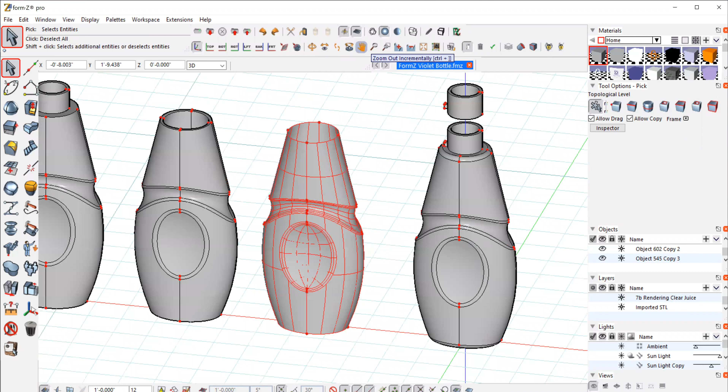I'm going to go back in our history of building the bottle and bring in the surfaces that we had created. I changed these surfaces for the 3D rendering and some of the other procedures, but I'm going to go back and we're in effect going to rebuild it for 3D printing here.

So I brought the surfaces in, I mirrored it back, and stitched them together. Normally, we just put a cover on the top, two-dimensional cover on the top and the bottom, and stitch that all together, and then we can create a thickened wall thickness.

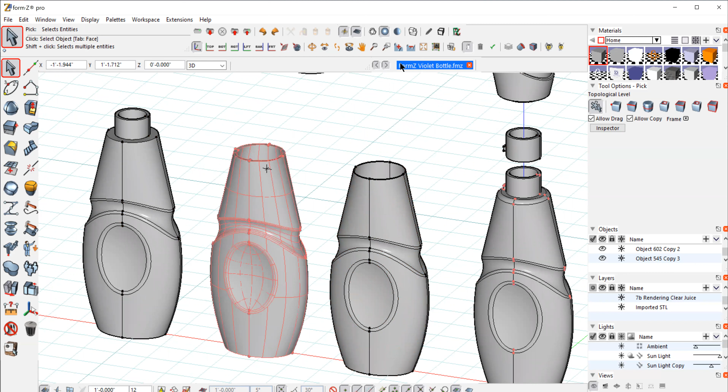There's this thicken tool over here, and we can select that and do a thickness. This particular one didn't work when I put the top and the bottom on it, so I'm just going to go about this a little bit differently. It did allow me to thicken the surfaces right here without putting the top and the bottom on it, which was good. So a little bit of a workaround to get this to happen. Got to keep that in mind.

There are many ways to accomplish these. So if something doesn't quite work right, think about other ways to get there.

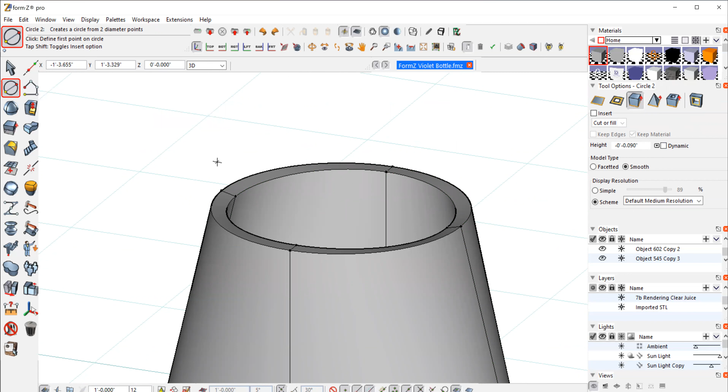So I'm going to put a cover on here with a thickness to it. I'm going to create a disc here with an extrusion. I'm going to go negative 0.09 because that's the wall thickness that I did for the rest of the wall. And I'm just going to make this 2D surface at the top, 3D surface at the top to cover this off. So I'm making that as an extrusion so it has a thickness to it.

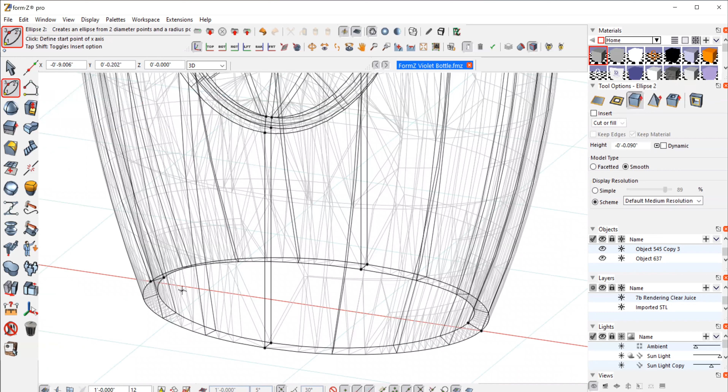I'll do this in wireframe so we can see. I'm going to use the oval tool here because this is an oval bottom. So I'm just selecting one side, coming to the other side. I need this to be positive though because I'm at the bottom, 0.09. And then I'm just going to click on the other side. So now I have that closure at the bottom.

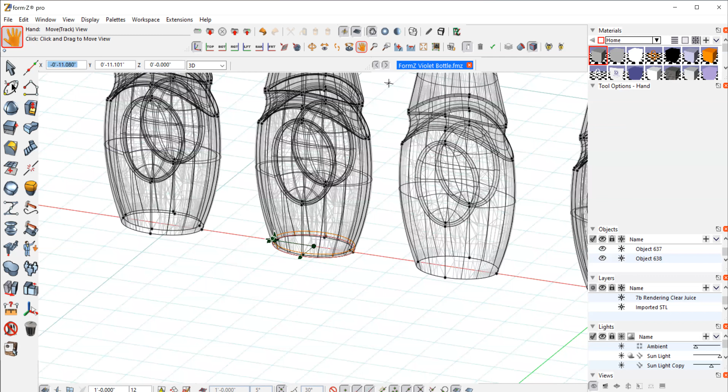And this should close up, and then I'll have my walled structure. Union. Okay, so now I have this completely sealed. It's hollow. I have a 90 wall throughout the whole part. So this is ready for that.

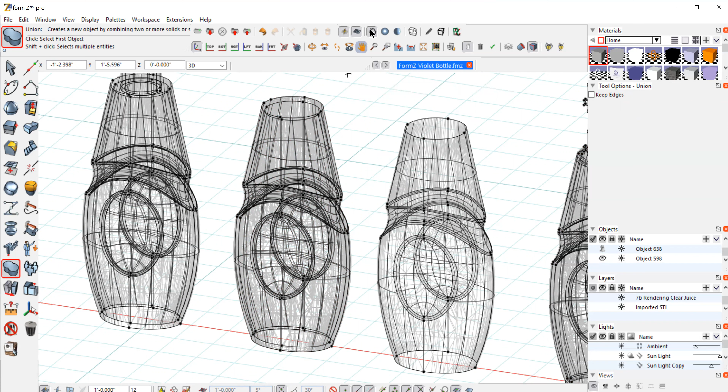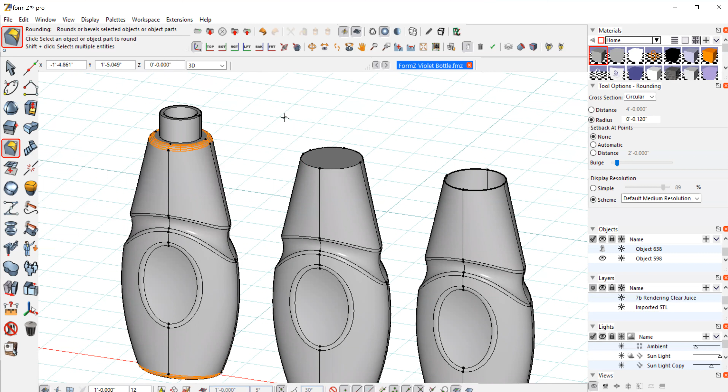So now I need a radius on the top and the bottom. So I can do that now. Since I have a nice thick wall, I can probably get away with about 120 thousandths radius. I think I did that both at the top and the bottom. So I'm just going to select that continuous lines section across the top, go to round. I think I did 0.12. Yeah, looks about right. So now I have a nice radius, top and bottom.

So that's ready to go.

Normally at the bottom of a bottle, you'll notice that there is a push-up, or sometimes referred to as a punt, a bump-up area in the bottom. That's for a couple of reasons. That's for structure, so when you pick it up, the bottom doesn't belly out because of the liquid inside. So it creates structure by having that negative curve at the bottom. And it also reduces the surface contact when you put a bottle on a flat surface. Sometimes if there's a little bit of water on it, the bottle will hydroplane. It'll kind of move around because it's not making contact there. So that push-up area has a couple of reasons, but we're not going to put that in our file because a 3D printer wants a nice flat surface to start with. It wants to print the flat surface, and then it wants to build the rest of the object from that. So in all our files for 3D printing, we're not going to have that push-up.

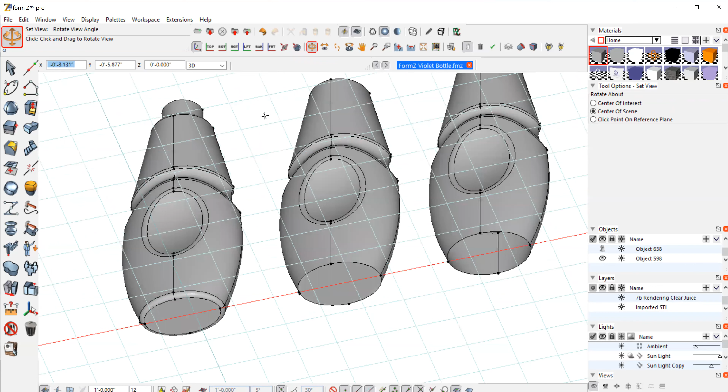So that's ready to go, and I have my radiuses. Now we need to simulate our finish. The finish is this area, the thread pattern or the screw pattern that we're going to have on top. We're not going to make thread patterns. We're just going to make this as a simulation of where the finish would be. We don't have to worry about the mechanics. And the screw thread, that can be an involved process.

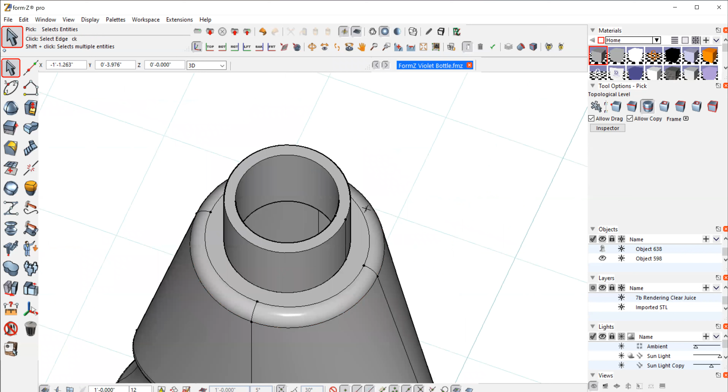I never do it myself. I get the 3D thread patterns from the engineers that create the preforms for these thread patterns that are tolerant to work with certain closures. So I'll get that geometry and I'll put that in the file if I need to. So all we're going to do is just create this 2D closure, 2D wall closure. And then we can do that with our tool in here. Let's see, it's 2D wall, 3D wall. And we can set up the specifications for that, the height and the thickness. It's a pretty straightforward part.

There's no real designing going on here, it's just a place to put our closure. So we create that, and then we difference that from that. Let me just

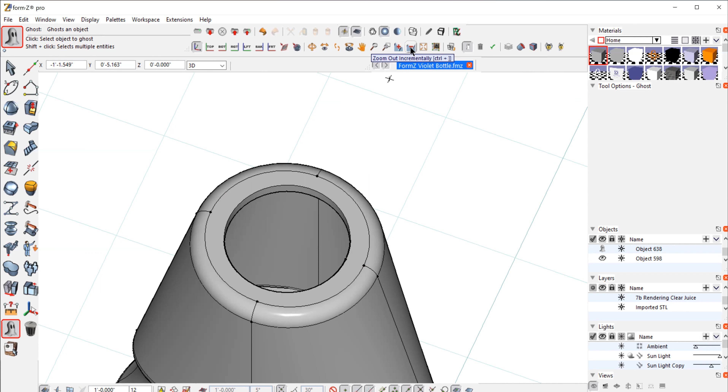We'll ghost this, difference that, take that leftover disk that's inside, and we'll end up unioning that. In most cases you're just going to make a straight dowel shape, a cylindrical shape, and then fit your closure on that. Sometimes if it's oriented, we need a little fitting, like this little block that's kind of arbitrary. I built this little shape and I'm also going to put that into the bottom of the closure because my closure is not perfectly round. It's oriented. If it's round, you don't need that — your closure can just spin around the top of the bottle, so that'll be fine. In this case I built that little notch in there, then I would union that to my bottle, and that part is ready to go.

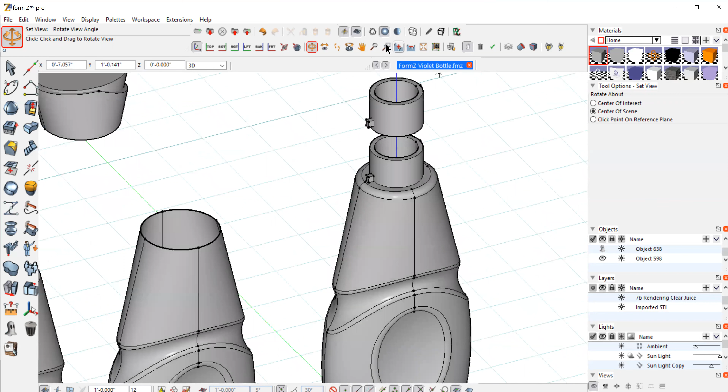So we have to talk about the closure now. With that simulated finish on top, I need to put an opening into the bottom of the closure that will fit over this. So we need to do that with a tolerance to it.

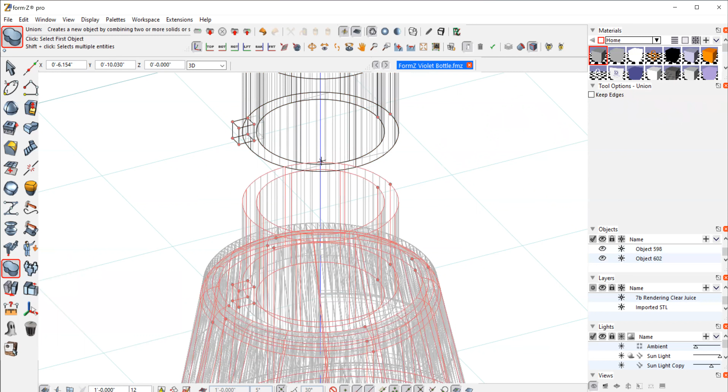So I have these parts here, I brought the parts up. Let's go into wireframe — there's my 2D closure, and I made this little block. So what I would do is just take those and union that together. And that's exactly what I have in the top of my bottle. So that's the part, and the reason I'm separating this is because I want to create a tolerance that I'm going to use to difference it from the closure.

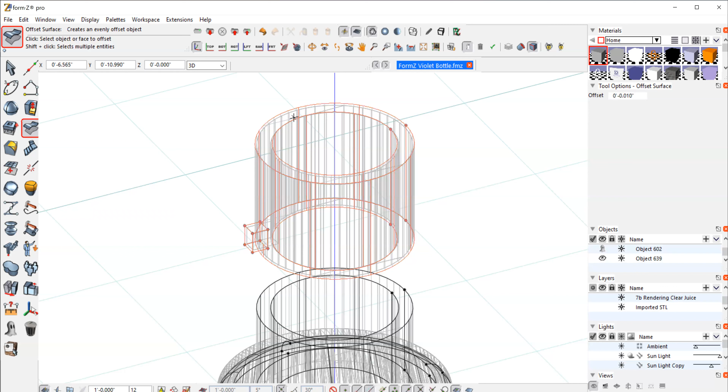So what we can do is select this shape and offset it — not thicken, but offset, the first tool down the bottom. Offsetting will make a larger version of this, so all I want to do is move this a very small amount so I have a clearance. I'm going to put this at 10 thousandths, so it's 0.01 — it'll give me this 10 thousandths clearance. I'll click in space here, and you'll see it move out slightly. So there it is, it moves. So I have a 10 thousandths clearance all around this entire part.

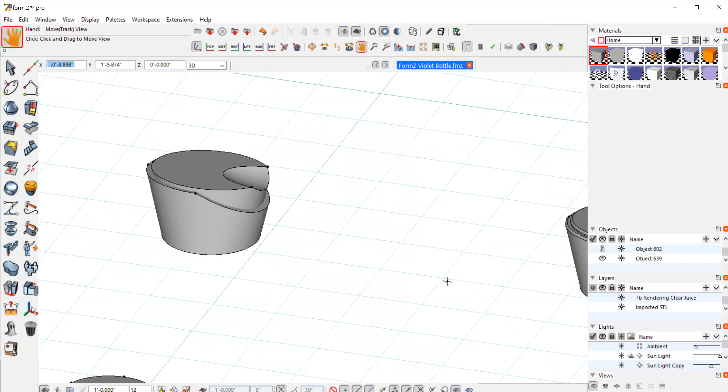And what we're going to do with that is take it and put it up into the closure and difference that. So we need to prepare the closure the same way we prepared the bottle. I brought my geometry in — if you remember the closure layer, I had built these two parts. In this situation we're going to take those two parts and union that together.

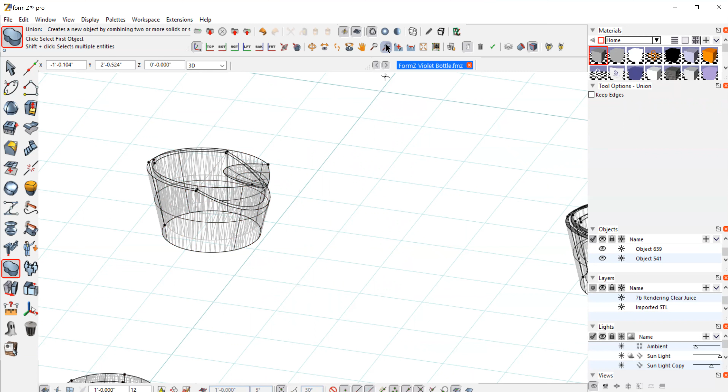Come on guys — take those two parts and union. So now this will be all one piece. And I am going to do my radiusing first in this situation. I created the wall thickness in this and it worked really well, so I'm going to do the radiusing separately. I'm going to do this little finger detail here first.

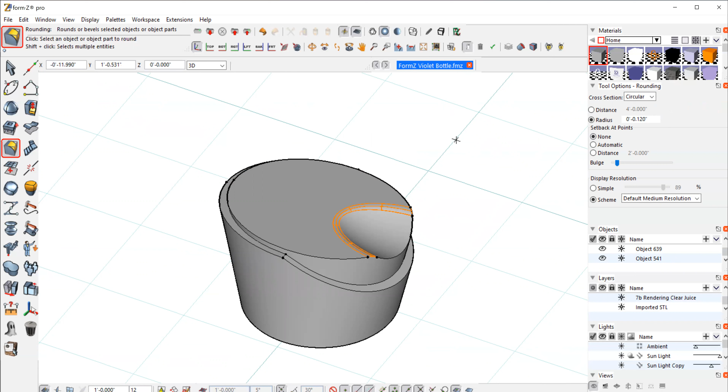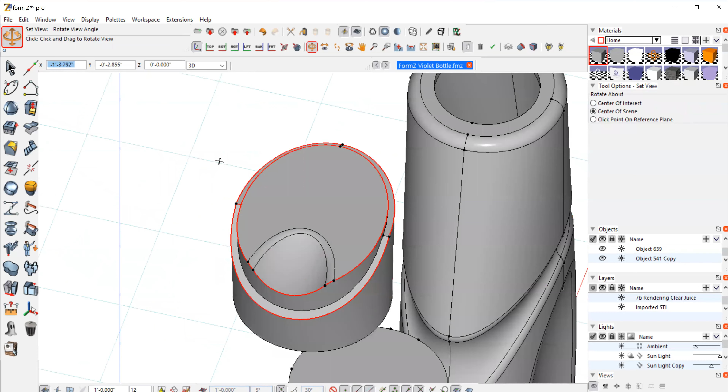I believe maybe 120 — yeah, that looks good. And then these other two sections, I'm going to select that line sequence, and select these other ones also, just this outside one here, and I believe I'm going to pick this little one here also. I think I did all those at 30 thousandths. This is just to hit off that edge, so it's on a sharp edge.

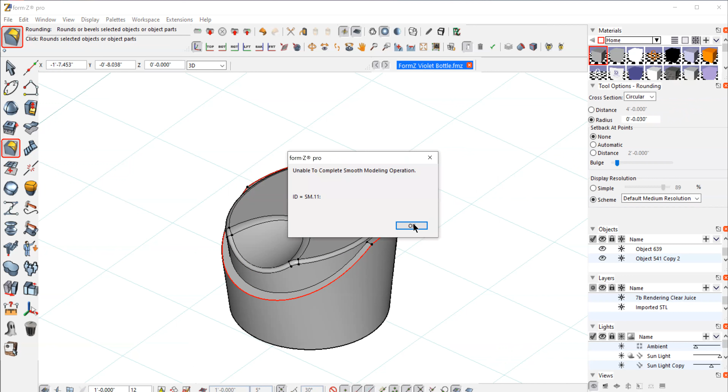Okay, it's not doing it, so let's do them individually. Let's select that one first, around 30. Okay, and then we'll do this one — that should round. Huh, so that's the one that's not going. Not sure why, I'll select those as individual sections — maybe that'll help.

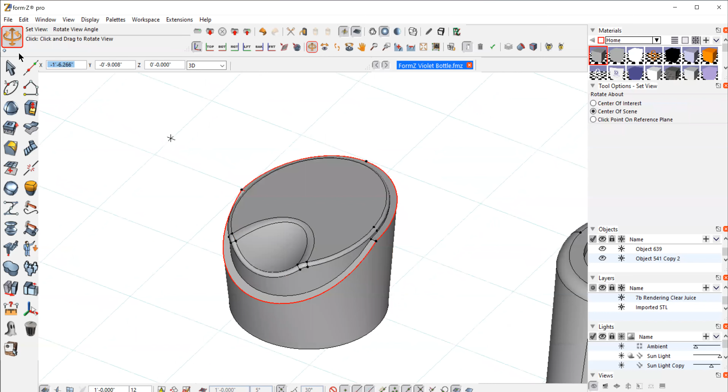Okay, we have the other side. All right, let's see if that rounds at 30. Okay, so that was it — I needed to take my time on that. I was trying to select them all at the same time. Okay, so we have all that radiusing going on.

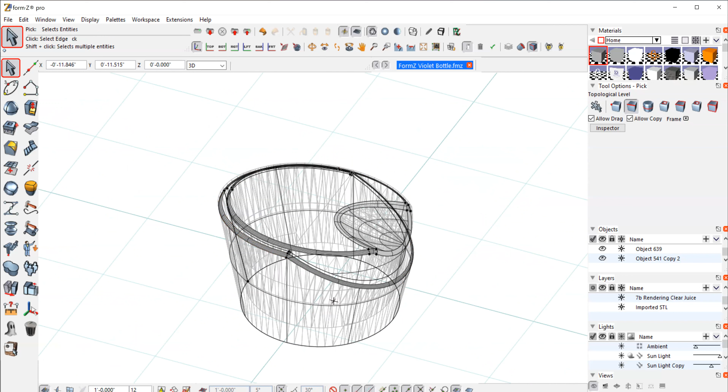So then we have to do the same thing, we have to create this wall thickness. Again, I could send this in as a solid, but since I want to open up the bottom so it fits over the finish on the bottle, I'm going to make this hollow. I'm going to do the same wall thickness — minimum 1.5 to 2 millimeters is a good wall thickness for strength. I tend to go 60 thousandths to 90, there's a bit of a range in there. I tend to go a little thicker to make sure we have enough stability in the part.

So that can vary, but they recommend 1.5 to 2 millimeters. If you have a large file, go thicker. If yours is pretty small, you can go thinner.

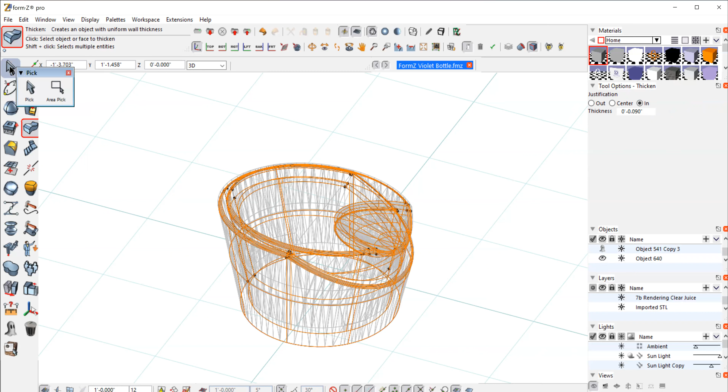So again, I'm going to go to the thicken tool. I have this selected, and I have it at 90, and it should go in. Sometimes it goes out, not in. Okay, so this worked really well. This is what I had expected the bottle to do, but it didn't, so I had to build it a little bit differently. Now I have a wall thickness.

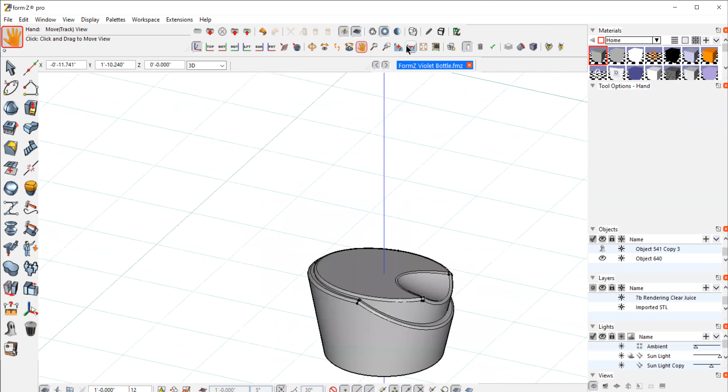If you remember, I took that finish detail and I toleranced it out. So what I'm going to do is push that up into the bottle structure. I'm going to select that, like a wireframe, view front. Now I have that piece inside and I'm clearing it.

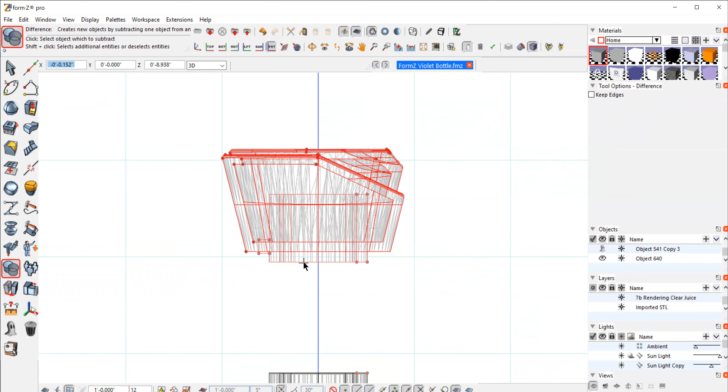So all I have to do here is difference that. I'm going to select the closure, difference that from that, and I will have the opening that's going to fit over the bottle. You can see the disc that's just the center of that part, so we don't need that. We're going to delete it.

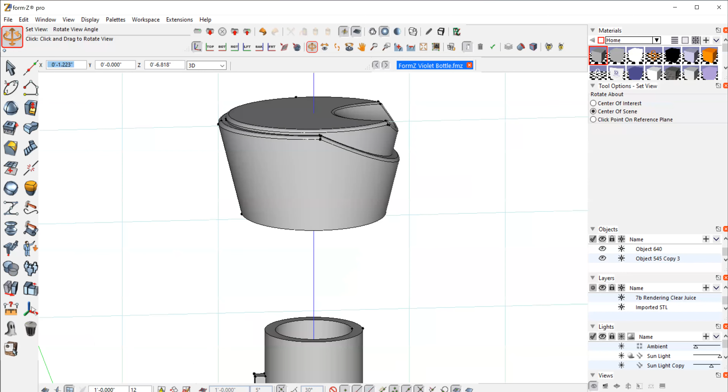Okay, so now this part will fit over the finish that I have on our bottle. So that's preparing the two parts, they're ready to go. These are parametric files.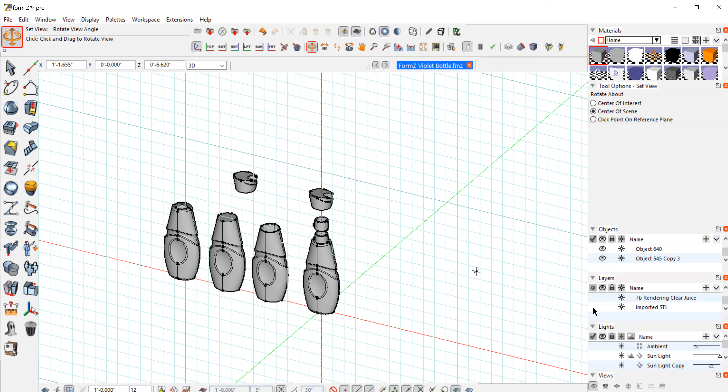We need to send ours out, not as a wireframe, but as a faceted object. So I have the original faceted object that I had sent out over here. I'm going to turn points off because this can get quite complicated looking.

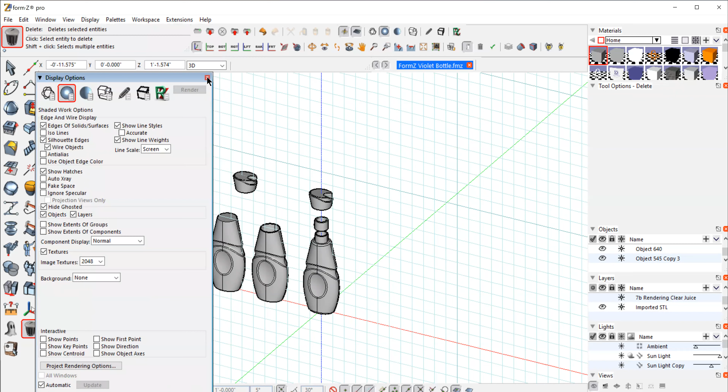Display options, no, don't want that. I want this. Turn points off. I'm going to show you what the file looks like. So here's all the triangulated facets look like. Now, when I originally did it, I did the push up in the bottom.

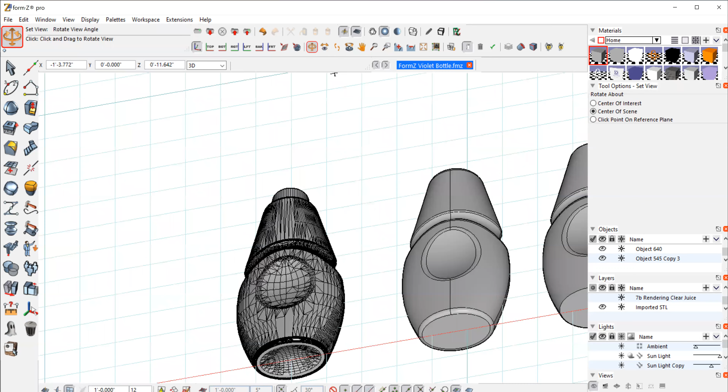So I'm taking that out to make it a little easier to print, so we're not going to do that. This is what the triangulated file looks like. I sent this out from Form Z, and I didn't do any alterations to it. I wanted to see how it came out, and it came out a little rough.

Some of these spaces between here aren't as fine as they could be, so we can adjust that. I'll help you do this, but we'll adjust our files.

Let's say this is our completed part here, and it has the finish on it. We are allowed to control the mesh on that. I'm going to select that, and if we go to our meshes area, and the poly mesh tool, and select that, we have options over here on how we can work with that.

So we will go into use expert options and set this down here. We have a minimum grid of 5 under U and V, so we set those to 5. And I set the normal angle tolerance at 5 degrees. Those are critical, all triangles.

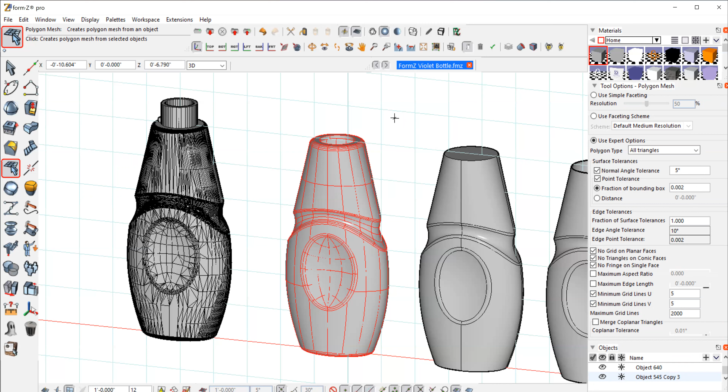So let's try that, that's going to give us a denser grid. If I just click in space with that on and this object selected, it'll show us what this mesh is going to look like. You can see the difference, how much tighter that mesh is. This is quite nice, and it broke it up.

See, some of these are kind of large, and I'll show you the 3D print in class, but these large surfaces down here are visible. And even in this negative curve here, they're quite visible. But by doing this, we have a really, really nice mesh.

So this is what I would save out. Normally if this was the file, we would select this, and then we're going to export. Not export image, but just plain export. We're going to come into, you can do an object file, but we're going to do STL. So we select on STL.

And these are the files I had sent out before. You're going to do one for your closure, and you're going to do one for your bottle. They have a naming convention at Pratt that we're going to do, but for now, just set it up so you know what it is. I set it up with these two names, and we'll talk about naming for the Pratt 3D printer area.

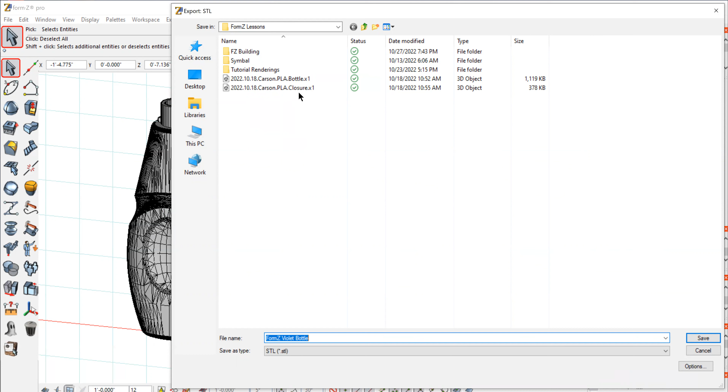I'm not going to save this out because I'm not going to use this particular file, but you will just save it here, and it'll be an STL file, and then it's ready to go. You'll do that for your bottle and for your closure. So that's preparing the file for 3D printing.